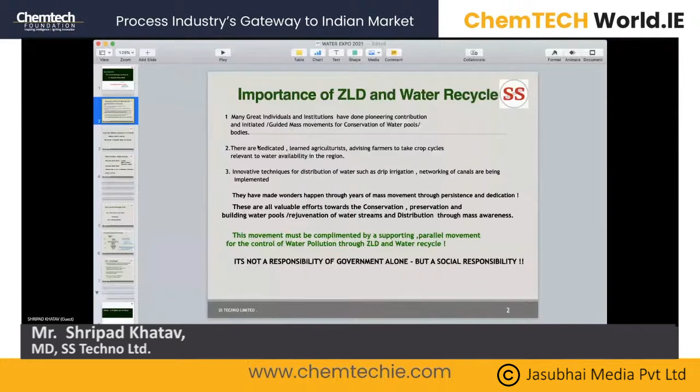Actually speaking, the water that an industry discharges into the nature should exactly match the water it receives from the nature. Theoretically, it should be like this. But this is simply not possible for various reasons. And that is why zero liquid discharge. By zero liquid discharge, we mean not a single drop of wastewater should go out of the industrial premises, and the entire water has to be recycled back to the industry.

Which means, for example, an industry discharges 1 million liters of water per day outside the industry, maybe into a river or into fields or whatever. The entire water has to be recycled back to the industry. So it doesn't take fresh water to that order, which means almost 1 million liters of fresh water intake is saved. This is the basic purpose of zero liquid discharge.

Now, what are the sources of water pollution where you require zero liquid discharge? There are 4 major sources according to me. The first one is municipal wastewater, which I'm not going to touch because this is not a subject of today's talk. I'm discussing only industrial wastewater. Natural sources and pollution due to pesticides and fertilizers, I'm not taking as a matter of subject.

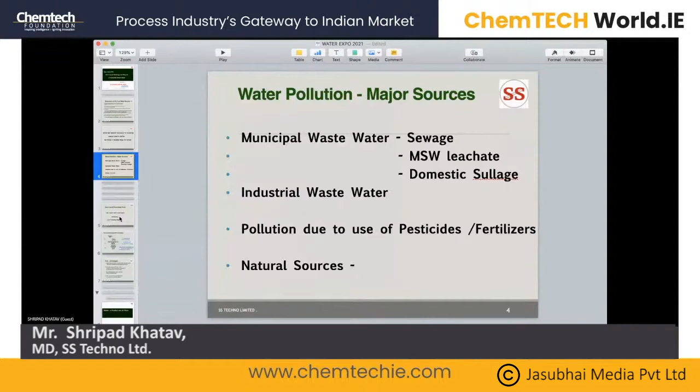Industrial wastewater, you have various types of industries. And when you are trying to have a zero discharge plant of industrial wastewater of a particular industry, it could be a combination of various technologies. It could be traditional ETP, biogas, membrane technology. And finally, whatever kind of technology you are using, in order to have zero liquid discharge, you need to have evaporation, crystallization, filtration, and drying. It is a combination of these unit operations, especially evaporation and drying.

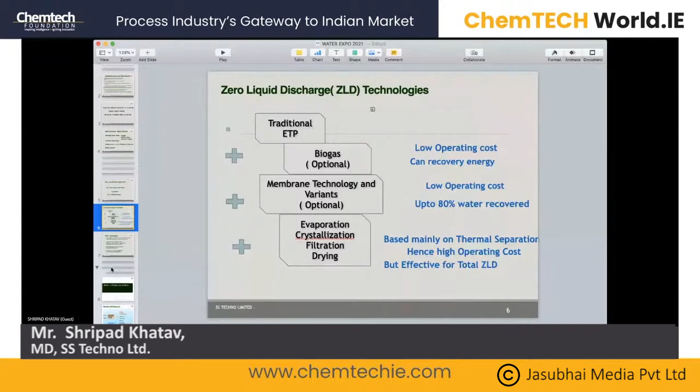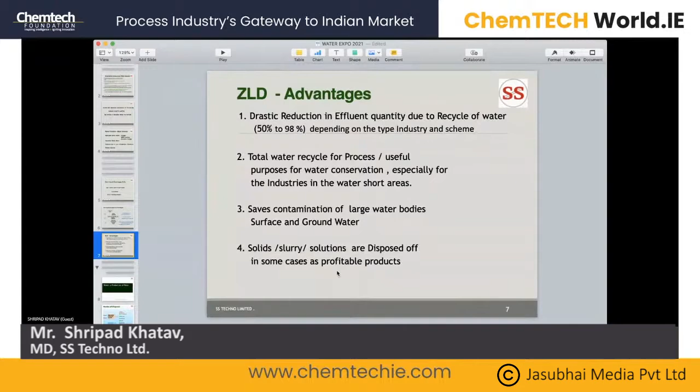The advantage of ZLD, as I was mentioning to you, you are recycling almost the entire water. In some cases, more than 50% water because you are generating a slurry which is reutilizable. It will promote water conservation because you are not using fresh water. And it will also bring down the contamination of large surface bodies.

After recycling of the water, what remains is solid waste. There are many ways of disposing of solid waste, because once you are recycling the water, what will you do with the waste? You can either use it as a landfill, or you can sell it as a product, compost it if it is organic waste and create fertilizer, incinerate it in your boiler, or gasify it. So you have so many options depending on the type of industry, and we have exercised most of these options in our plants.

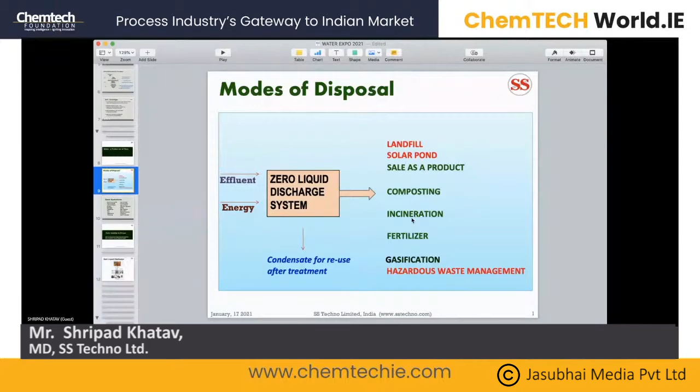And we are handling almost all types of wastewater from all these industries. You can see almost every industry we have handled, and every solution is unique. When you are recycling the water, creating solid waste and finding out the uses for solid waste, every solution is unique because it is governed by techno-commercial, legal, social, locational, even country-wise factors. The solution changes. We have given plants in almost 15 countries, so country-wise, the solution totally changes.

In short, industrial wastewater, then you are treating it, you are recycling water, and finally the solids are disposed. This is, in short, the technology. Now let me take a couple of case studies.

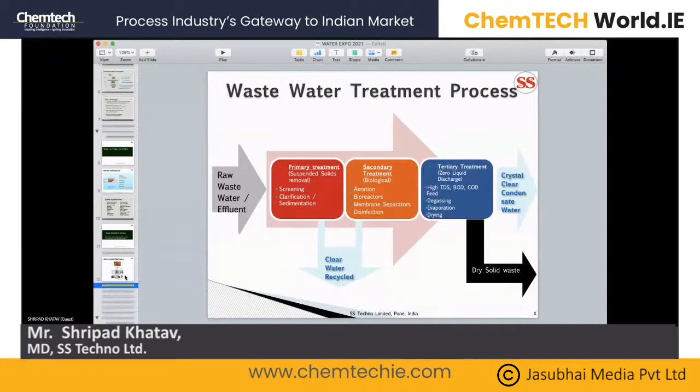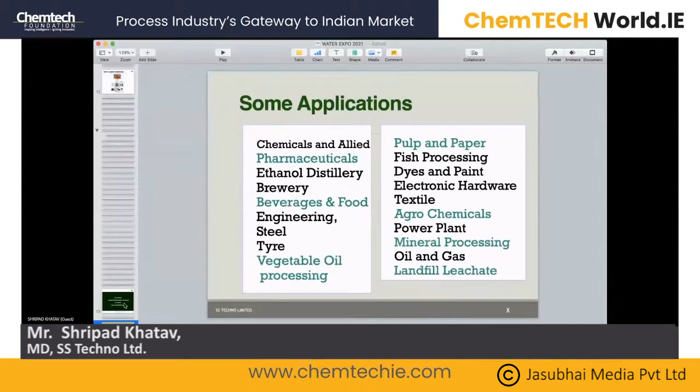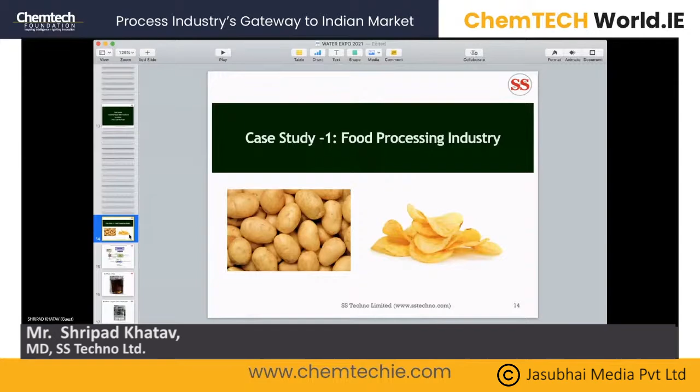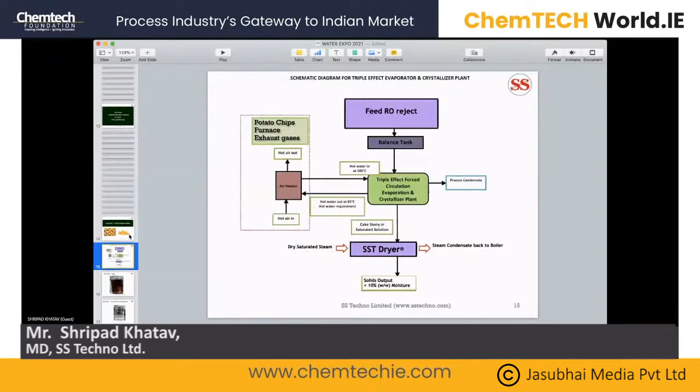The first case study I want to take is about a food processing industry. It's a global giant in food processing and beverages. These plants were given in South America. Now, the wastewater is very bad. It is smelly and it contaminates the nearby water bodies. So they requested us to supply a zero liquid discharge plant, and their main product is potato chips. It's a global brand.

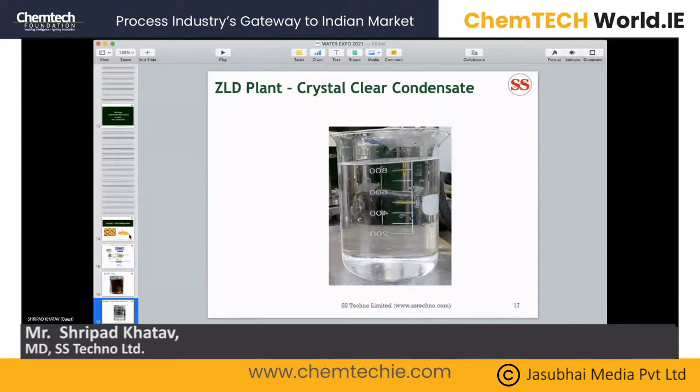And the solids we are collecting through our dryer, and it is used for landfill. It's a real zero discharge, not a drop of water is going out of the industrial premises.

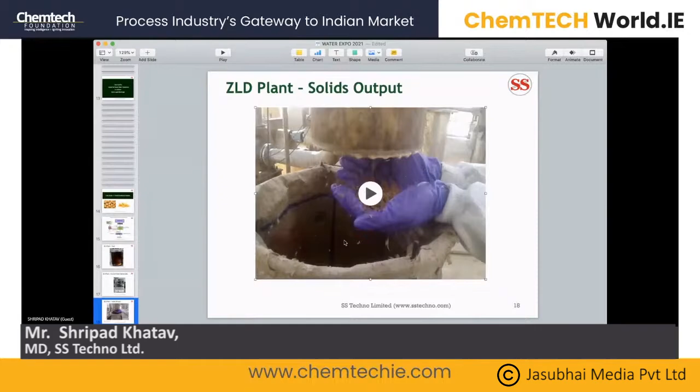And this is the plant we supplied from India. We have done a repeat order this year. So during COVID, the erection has taken place, and now we'll be commissioning the plant. This is the second plant we have done for them in Colombia. Okay. The entire plant, including the structure, has been supplied by us.

And this technology is very unique because this requires a heat source for evaporation of wastewater. And we are providing the heat from their potato frying furnace. It means practically the expenditure on heat is zero. We are utilizing the waste heat. Okay, the plant is successful, so we have got a repeat order, and we are mostly getting another 3 repeat orders from South America.

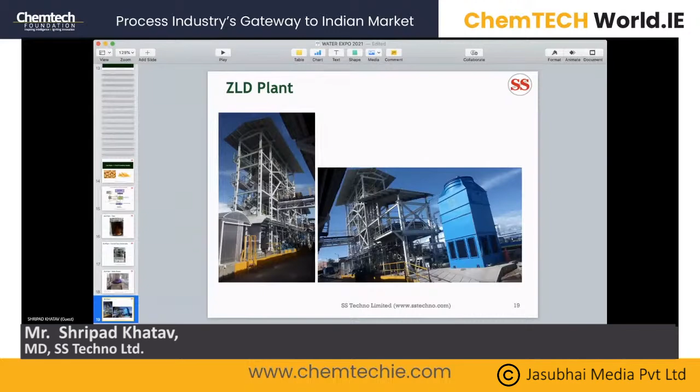Then another case study is on ethanol industry, where we have more than 35 references in India and outside India also. As you are aware, cane molasses is used for making ethanol or alcohol. Alcohol is used for potable purposes as well as for fuel, as a mix with the fuel. And I'll just show you a slide as to what we are doing for this industry.

And this technology has been developed totally in-house. Evaporation is a unit operation available in chemical engineering, but there are fine things which need to be incorporated. Because if this water is slightly colored, yellowish, contaminated, you cannot reuse it. So this water is totally reusable, and that is the credit to my company.

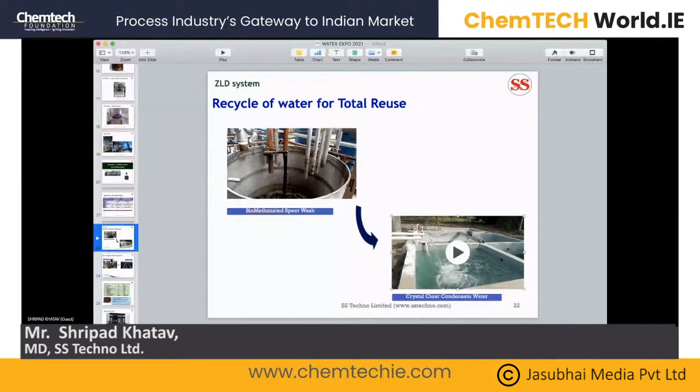Now, once you remove the water, the solids are utilized either for composting, biocomposting, along with sugarcane press mud, and a process that we have developed is that we dry the concentrate in order to produce solid fertilizer. This is a very unique fertilizer, the value of which is being realized by customers now, that it is having more than 20% organic carbon. We have done 4 plants till now, and we have found that more than 20% organic carbon is available in the solid fertilizer.

Why? I mean, what is the importance of this figure 20%? In soil, we have not more than 0.5 to 0.7% organic carbon. In fertilizers, organic fertilizers, which are made out of cow dung and all that, not more than 4% organic carbon is available. So 20% is definitely a big quantity. And this also has more than 15% potash in form of K2O.

So when you say NPK fertilizer, the K is imported in India from countries which are old Soviet bloc. It is imported at a very heavy price. Whereas it exists in this fertilizer, which is otherwise a waste. Okay. So we are trying to make this popular. We have made representation to various institutions and government bodies. And slowly the importance of this is understood by customers.

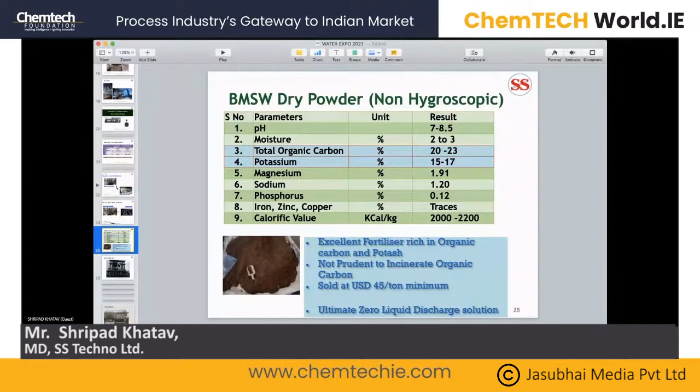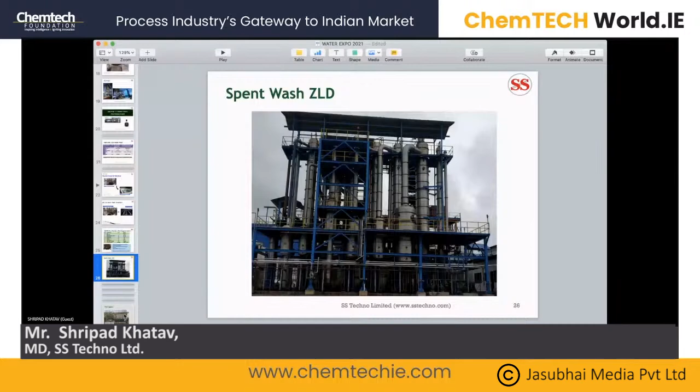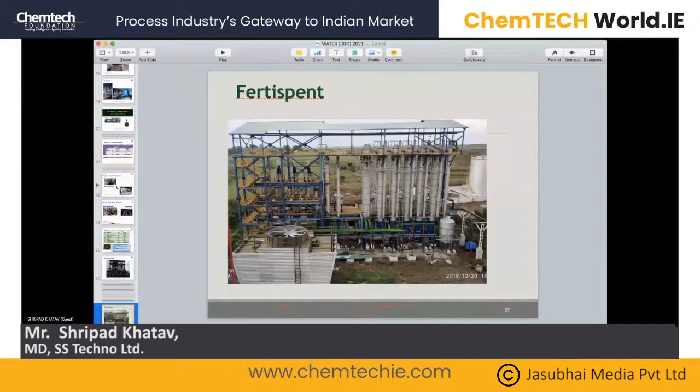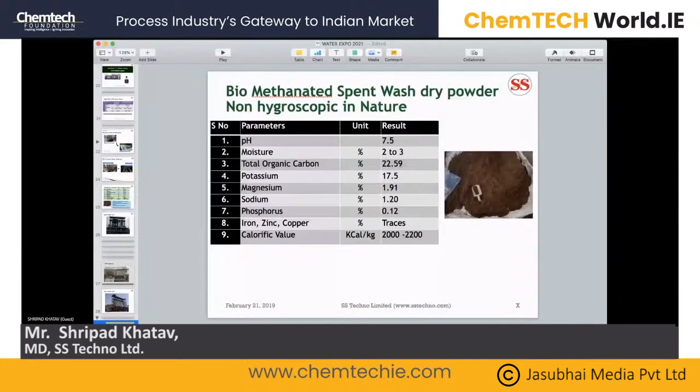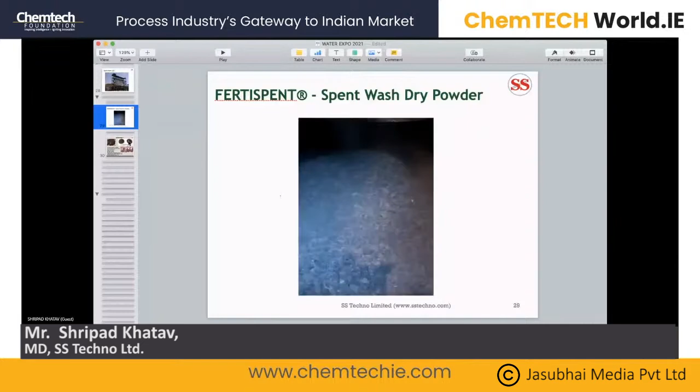And a small clip on this. This is a product from the dryer, which goes as fertilizer. And one of my customers is selling at a good price, and he calls it K Boost. K Boost is nothing but potassium boost. Okay. So this is what I wanted to present in this presentation of 10 minutes, 2 case studies, and the importance of water recycle and zero liquid discharge.

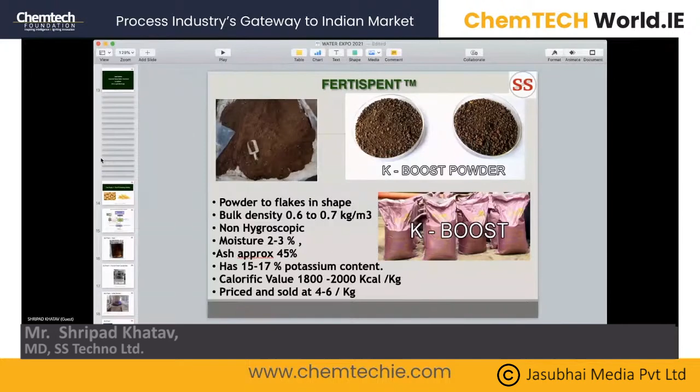Okay. So this is many times lower than the drinking water specification suggested by WHO. WHO suggests 500 ppm. And 150 ppm is really an excellent composition. And even if you have all 150 ppm as chloride, it can be used for cooling tower. There is no issue. Another aspect which is important for recycle to cooling tower is the COD, chemical oxygen demand. Yes. Of the wastewater. Otherwise, high COD and BOD in the recycled water, that is makeup water, can give rise to bioorganisms in cooling tower. That is another headache.

The water that is recycled, depending on the type of industry. For example, if you have an industry like alcohol-based industry, the effluent which I was talking about, there we are able to maintain COD of 750 ppm and below. Okay, so this water can be recycled in cooling tower. My customers are doing it; they have no issues about it. And the BOD will be less than 250 ppm in such cases. So my customers are doing it.